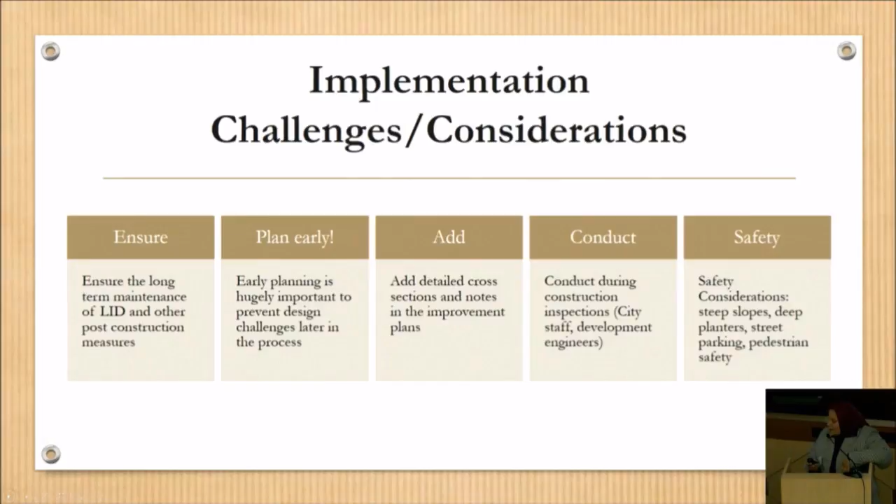The focus of today's presentation is to go over the city's maintenance verification process. This was a question that came up in the last LID conference about how to deal with some of the O&M challenges. It's also a question that came up in a couple of the CASQA presentations at the last CASQA conference.

We're going to give a quick overview of our maintenance program. This is very much related to private development parcels—it does not cover things in the right-of-way, but it gives you a taste of what the program looks like.

We'll go over what we do at the plan review phase to set up maintenance long-term, what the verification process is, inspections—which is the fun part, but also the frustrating part depending on what you run into out in the field—and then inspiration from local examples.

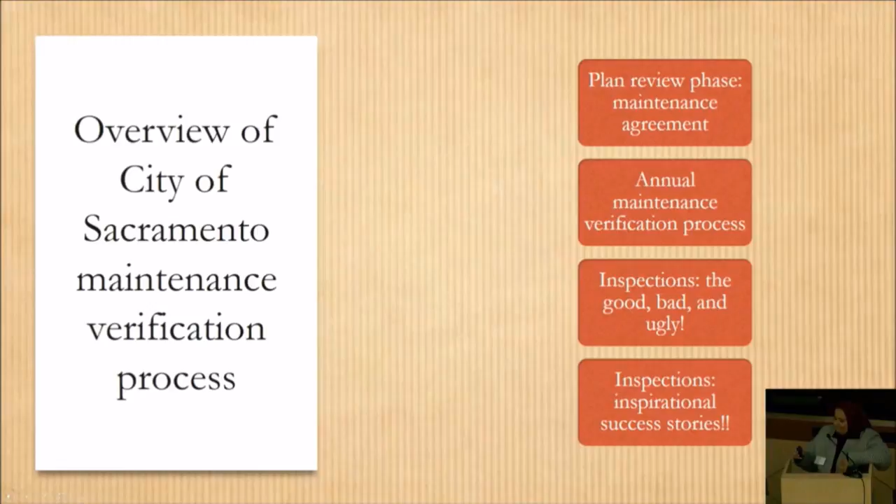At the plan review phase—that's the most important phase—because depending on what the project is building, the land use, and the threshold or size of the project, that's what triggers the need to execute a maintenance agreement. Most of the time, that trigger is really for the requirement itself, which then, as a side effect, requires you to execute a maintenance agreement with the city.

The maintenance agreement is recorded with the deed because we want to make sure that in the future, as the owners of the parcel change, the agreement follows the new owners. In a lot of cases, a developer executes the agreement upfront with the city, but a couple of years later sells the property to somebody else—so you'll want that mechanism in place to ensure it's always there, no matter who the owner is.

We require that the executed maintenance agreement be submitted before the improvement plans are approved. That allows us to make sure we actually get them. A lot of times, if you work for a public agency, once the project is approved you don't have a hammer over people submitting stuff—they can just ignore your request and not submit one, or you'd have to later in the process, like at the occupancy certificate stage, try to use that mechanism to get them to submit the agreement, which is not ideal.

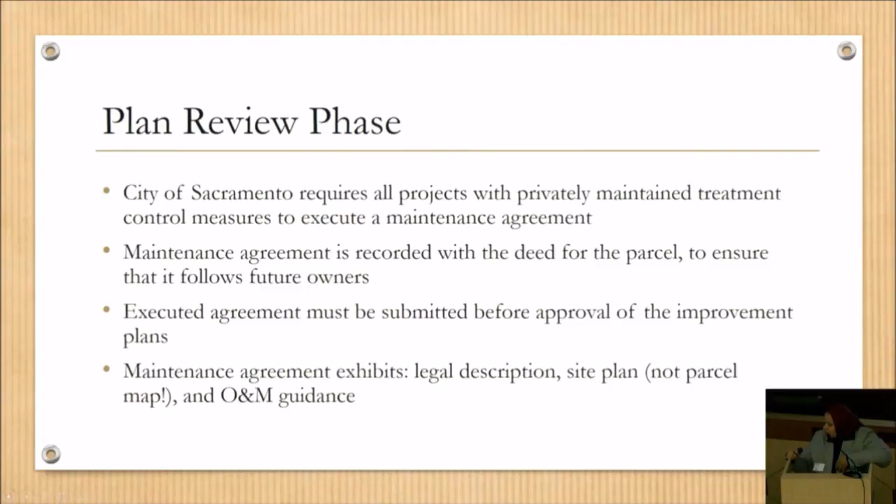The site plan is hugely important—we do not want a copy of the parcel map, that does not help us any. We want a smaller version of the site plan, whether you make a copy of your grading sheet or any other sheet with the appropriate information. We want to know the exact location of the BMPs, have you delineate those BMPs, and we want to use that site plan later when we go out to do inspections to pinpoint where the BMPs should be, and also the number of BMPs.

So if the site plan shows 5 swales and we go out to the site later and we see only 2 swales, that's a problem, right? So that's why these site plans are quite important.

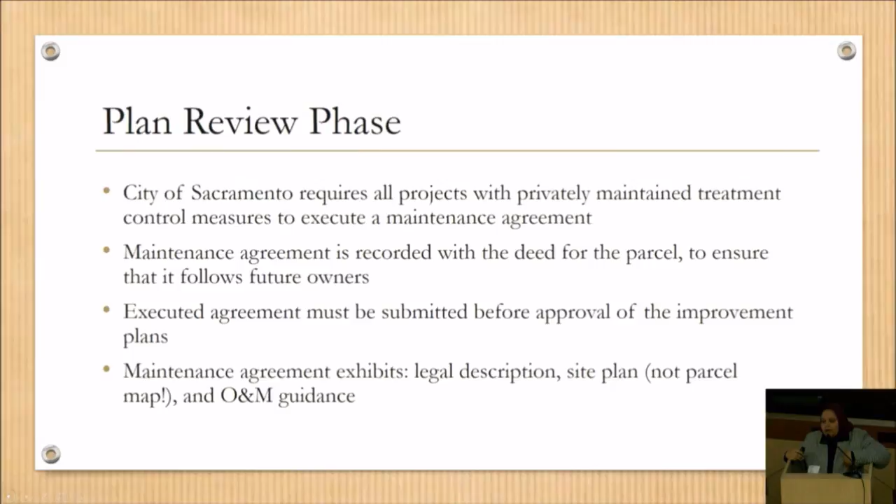And then finally, O&M guidance, which for a lot of the BMPs in the manual, we literally have a table that people can copy that includes the typical O&M expected maintenance information.

So, the annual maintenance verification process. We basically send out letters to all site owners that have these BMPs on site. We have a database that tracks the BMPs as well as the owner information. We update that on an annual basis, and we use that database to create the letters that we then send out. We give people about a month or so to respond.

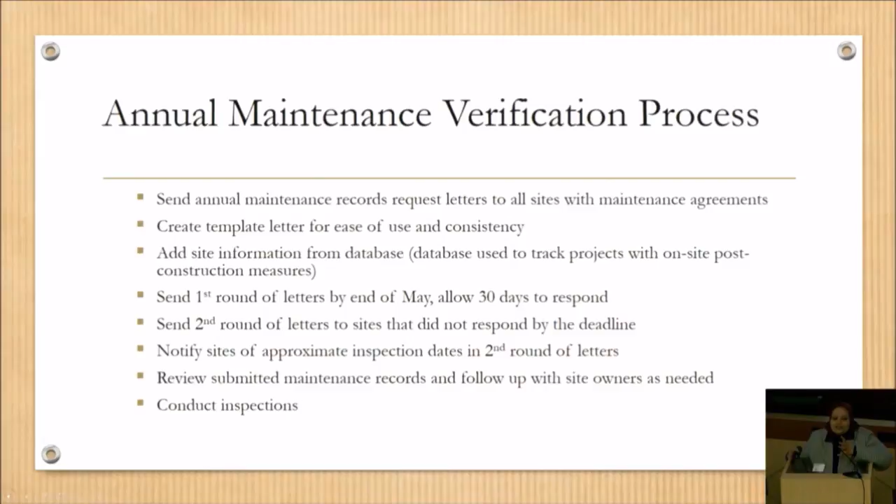And then we send a second round of letters to the non-responders, obviously. And then from there, we kind of narrow down the list of the sites we want to inspect. Ideally, if you have the resources, you want to inspect all of them. We don't necessarily have the resources to do that, so we narrow it down to the non-responders, the ones that submit maintenance information that looks a little shady or things like that. So that's how we come up with the inspection list.

Submittal examples: we actually have a template form for vegetated swales, for example, that we send out with letters to sites that have swales, and all they have to do is fill out the form as well as attach photos and things like that. So whenever we can, we try to help people out up front, giving them more guidance on what they need to submit.

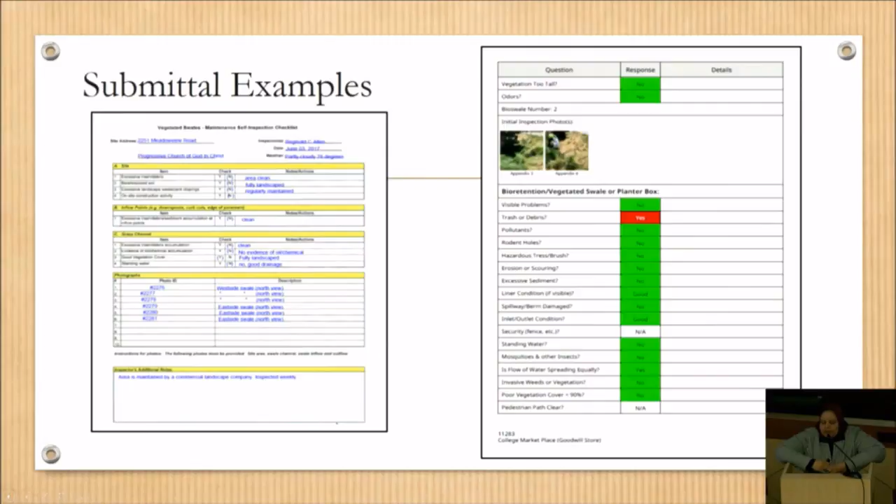There's also people who use companies that do much more sophisticated reporting. So the other example, the one that has the yes and no, this is one that a site submitted that was developed by a consultant that they used. For each of the swales on site, they have a yes or no table as well as photos to go with it and things like that. So you can do, as long as you're able to convey the same information we're asking for from our form, you can be creative and submit what you want.

So we review all that when it comes in and make sure it's all correct and looks fine.

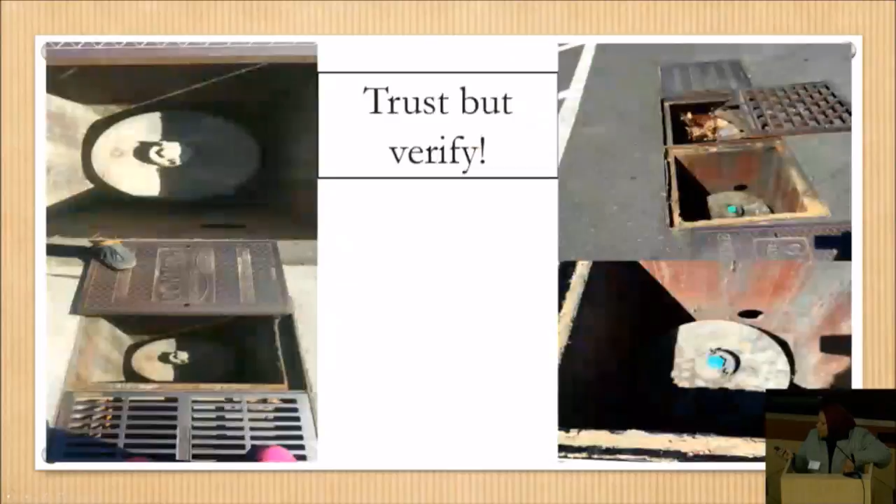I would say, similar to how we deal with our kids when they say they've done their homework, you want to trust but verify. So we want to trust that people are doing their due diligence and submitting correct information, but it also doesn't hurt to do some checking. So on an annual basis we select a certain number of sites that we inspect just to make sure the information submitted is correct.

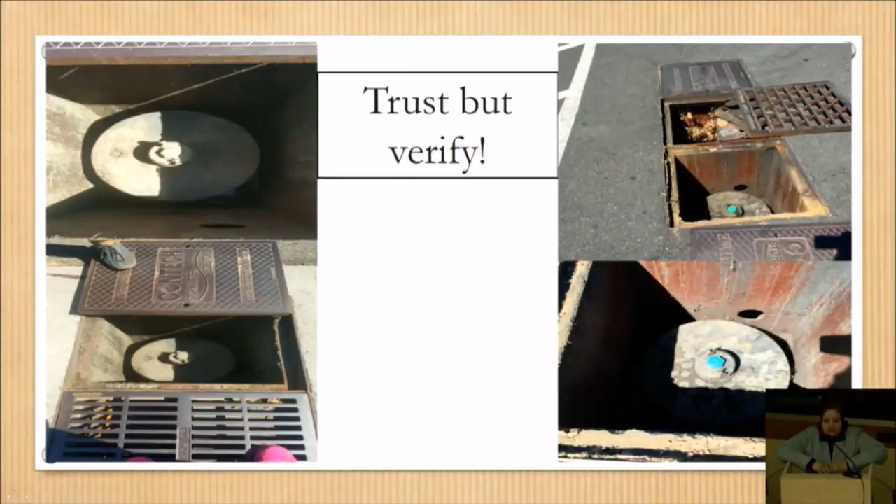Mostly, I would say if I had to pick, it would be sites that we haven't inspected before because it's a new project that just got finished with construction, things like that.

So now I'm going to go over some inspection photo examples, and we're going to cover good, bad, and ugly. These are examples of good inspections, and when I say follow the raindrop, basically you want to make sure that the curb openings where the runoff is supposed to flow into your swales and green infrastructure have no obstructions. You want to make sure nobody puts too much cobble and blocks that flow. Overgrown grass, that's very common. Things like that. So that's kind of one of the first things we look for when we go out to the site.

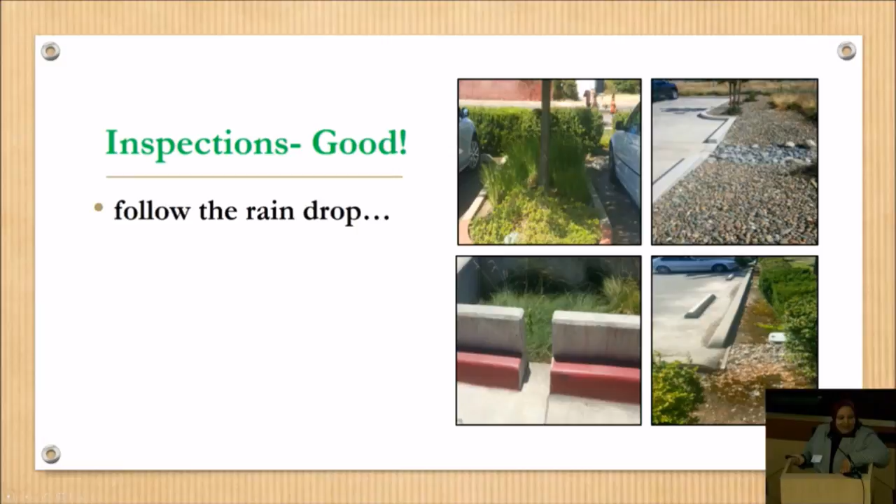Inspection is good. So these are photos of vegetated swales. And although some people are starting to call these traditional green infrastructure, they're very reliable. We've done them for a long time. Applicants as well as agency staff, we know what works, we know what doesn't. And that in itself is huge. So I would say don't discount swales.

And now to make it more of an LID feature, we're asking people to incorporate an amended soil layer into it to promote more retention of the flow as well as treatment.

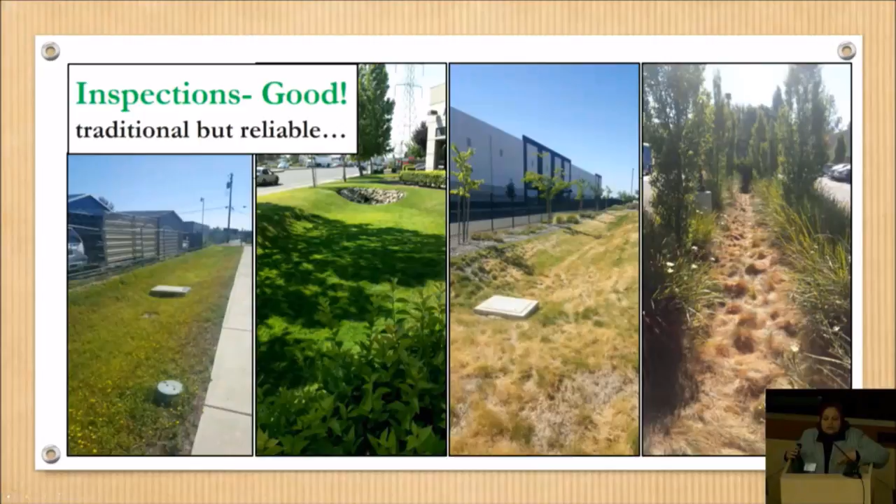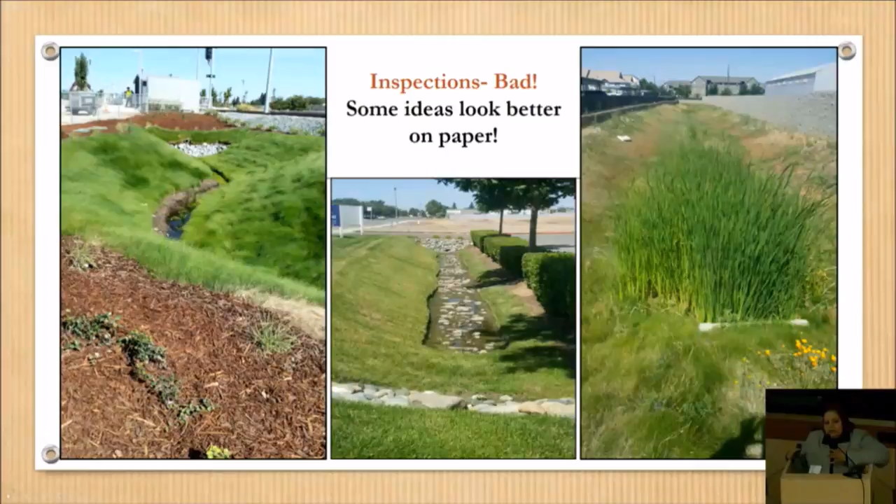And because of that, we start getting either vegetation growth that is not intended and becomes an issue, or you actually have dead grass because there's way too much water and it's wet for too long. So I would definitely advise against doing that design.

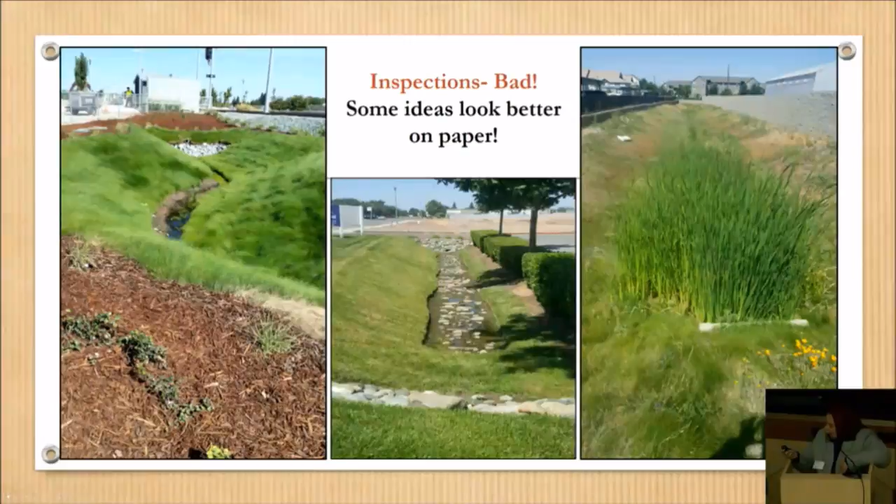Inspections are bad, again, whether it's lack of vegetation because people stop watering. The city told us to save water - we still want you to save water, but we definitely do not want to completely kill the grass and turn this into a dirt swale, because now we're creating pollutants and muddy runoff that goes into our drainage system instead of actually filtering and cleaning it.

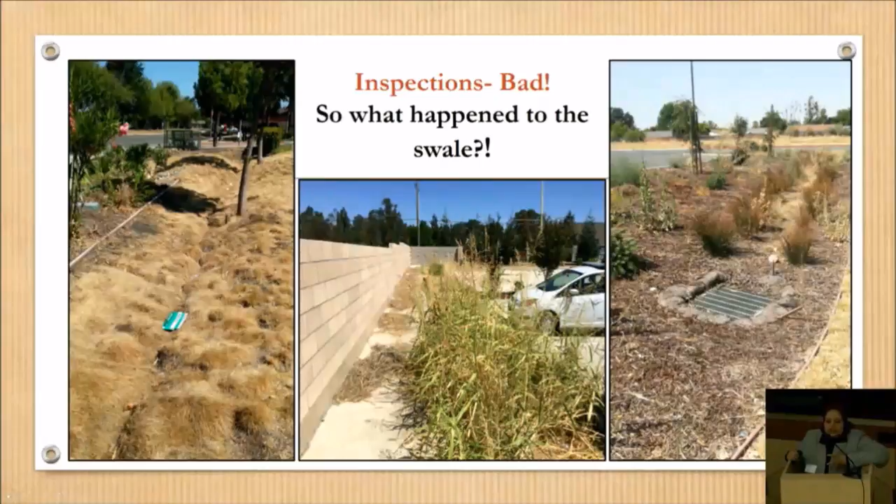We also have vegetation overgrowth, that sort of stuff. And that's where the site plan becomes huge, because you can use that to try to see what's going on with the site. Okay, I'll go a little faster.

Inspection's bad again. You want to make sure that there is no vegetation overgrowth or stuff that's impeding where the flow is supposed to go into the green features.

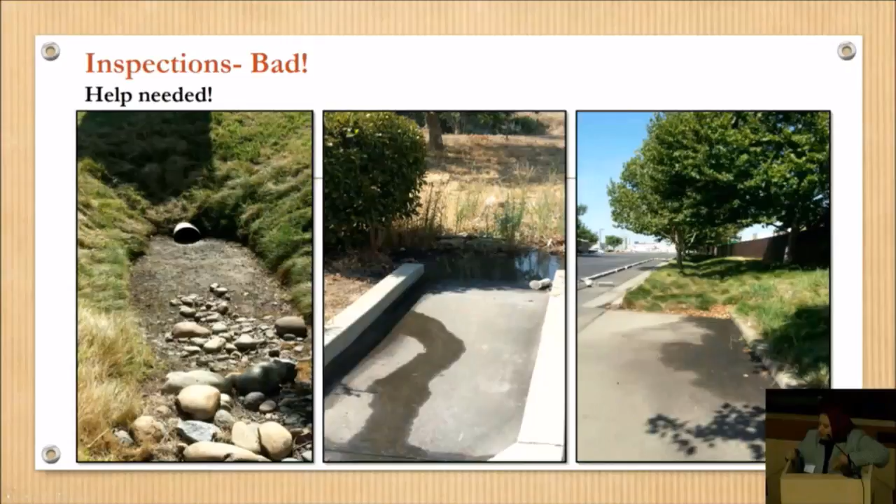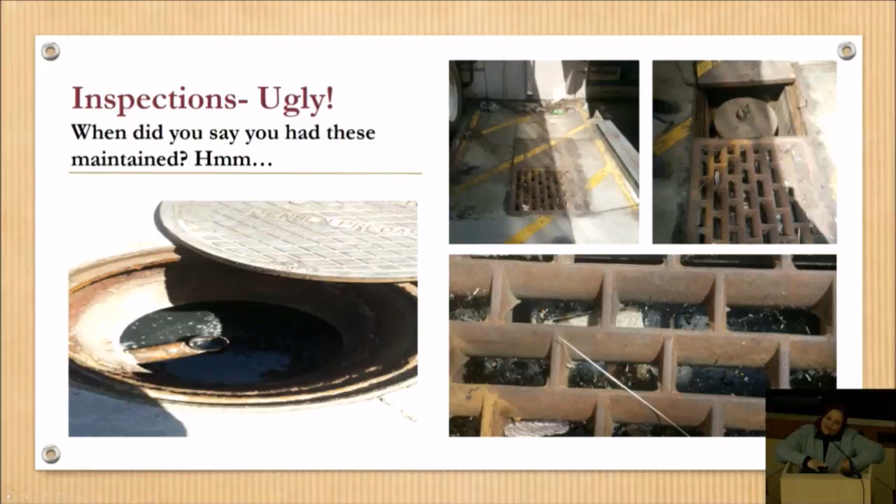There's also sometimes innocent mistakes where people go out and clean the wrong device. When we go out and do that face-to-face interaction, they say, oh, I just cleaned this manhole right here. And you go, well, that's not exactly what we wanted you to clean - it's the other one in the back. And they go, oh, right. So the inspections are great for educational purposes as well.

Another example of a unit that was missing because it was under a huge container for a couple of years. Finally, they were able to find it after we kept bugging them with letters and went out and inspected a couple of times. Finally they found it and cleaned it, and it had a bunch of built up sediment in it.

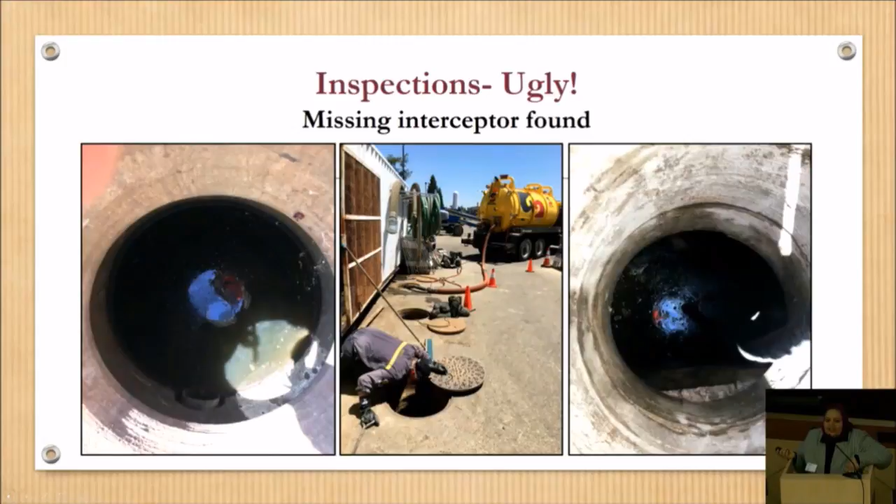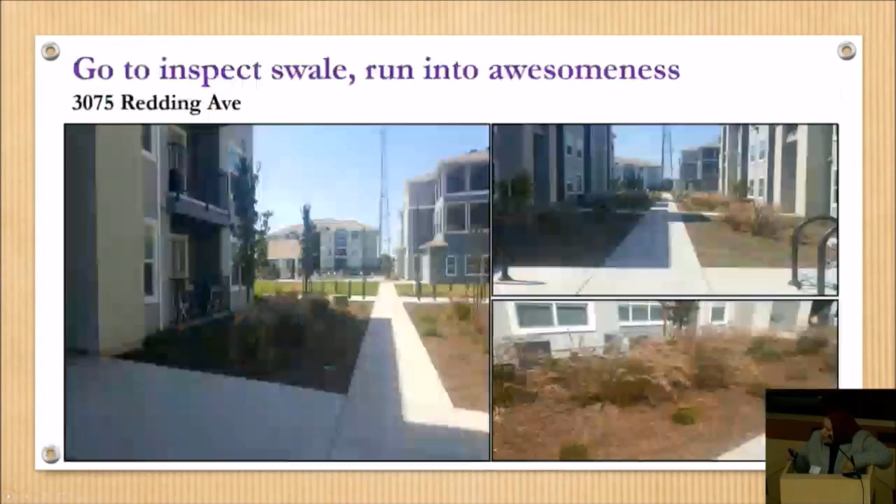This is the apartment complex that has a vegetated swale that we went out to inspect, but they have these really nice landscaped areas around the buildings where, again, all the roof runoff goes to the landscaped areas as well as the walkways and the impervious areas around it. So perfect example of how we can use those areas to disconnect impervious areas and try to filter some of that runoff before it goes to the drainage system.

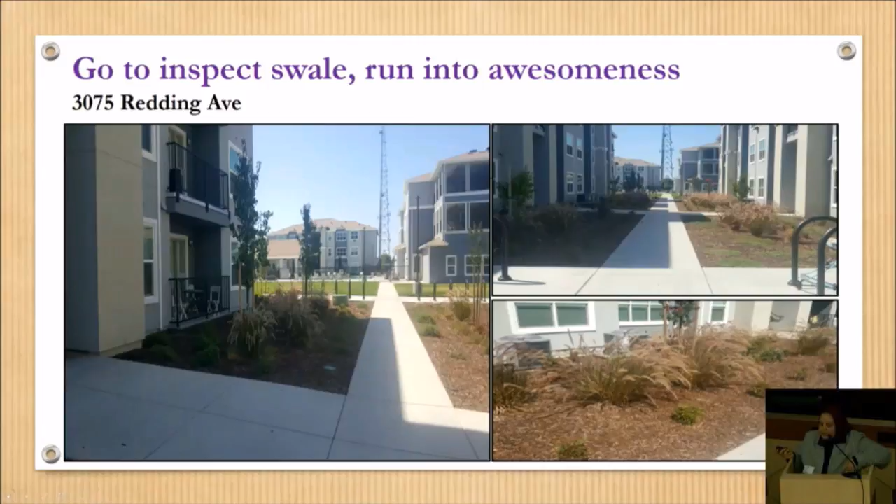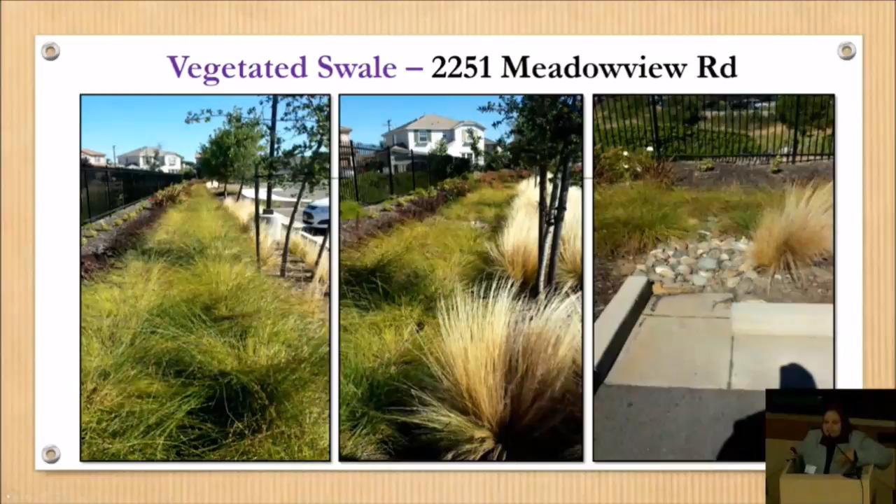We're trying to change the look of swales from very heavy use grasses to stuff that will still provide full coverage of your swale area, but use less water. So this is kind of an example of that. I think there's a little bit of improvement and evolution happening in the landscaping area for some of that.

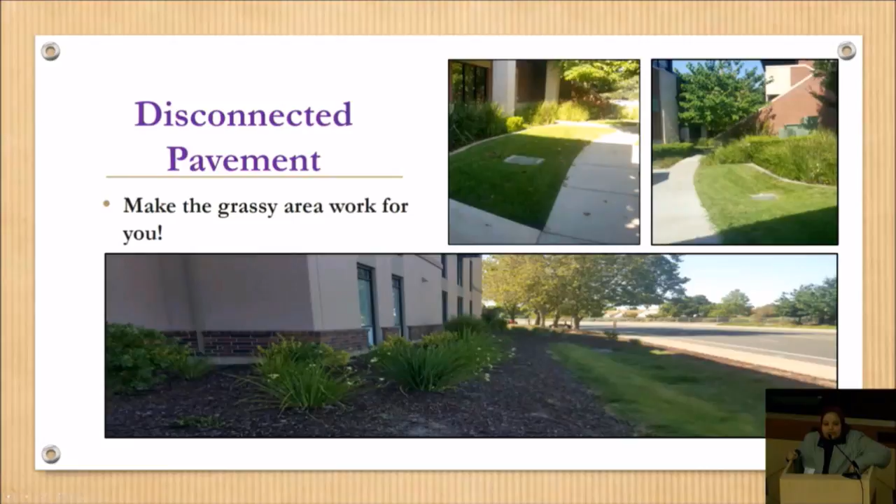Disconnected pavement - make your green areas work for you, don't make it just a useless green area. At a minimum, make it depressed. Allow some of the runoff to go through it and get filtered, even if it's not a full-blown design green infrastructure facility. This is one of the office complexes in the city.

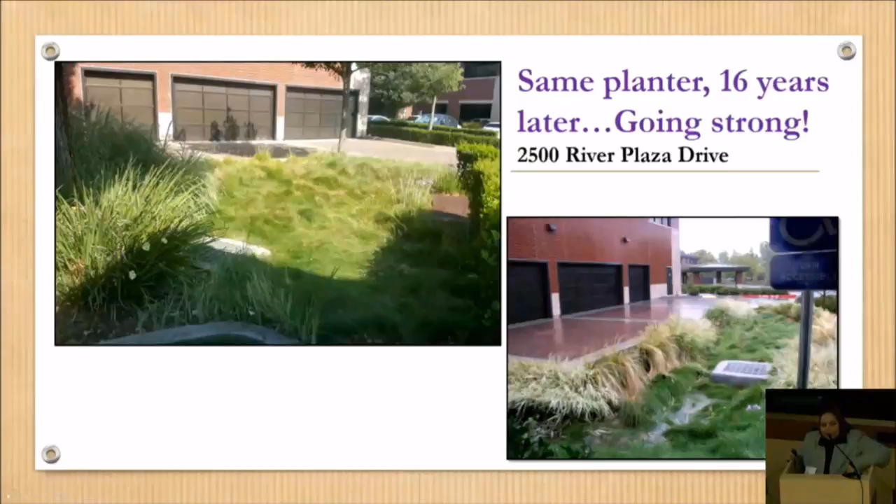Same bioretention planters 16 years later, and still going strong. We go out, we inspect, we find these gems, and then you use them as inspiration that these things do last and they do work. And no, you don't have to spend millions trying to maintain them.

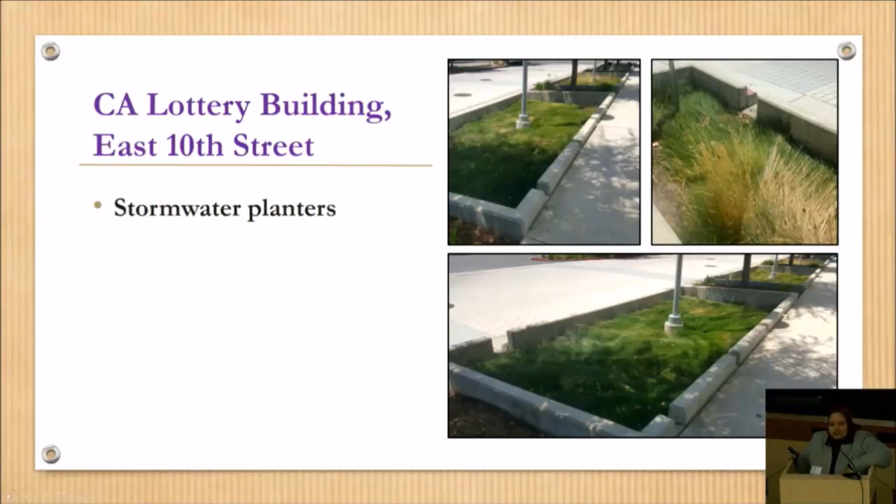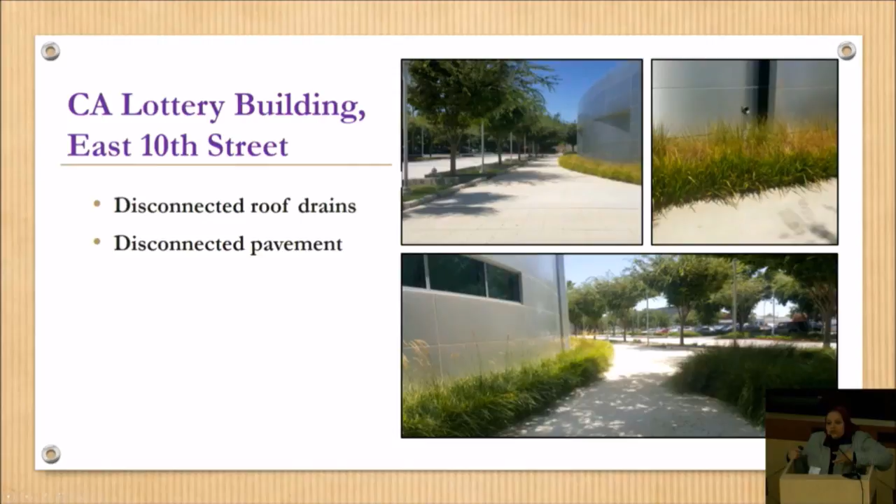For the Home Depot, Walmart of the world, they don't execute a maintenance agreement - we don't. That's just part of the expectation that they will somehow figure a way to make sure they maintain the measures. We don't get too into the details about financial funding for that.

For the larger projects, like a large subdivision project where it would be HOA maintained, for example, we did have a couple of city subdivisions where we do collect some backup money in the CFD to make sure we will have access to that money if needed to help with the maintenance. It's case by case.